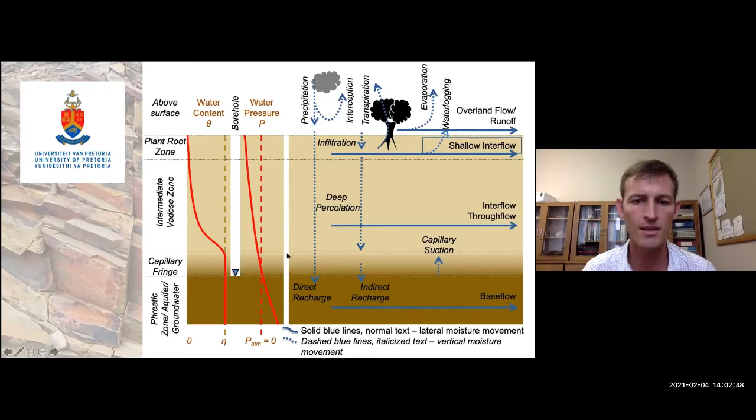Okay, so continuing, this is essentially a simplified model of where we started. As we all understand, between the surface and the groundwater table, we sit with quite a complex distribution of materials. Part of that is a soil zone in which we have influences of evapotranspiration. There's a lot of work being done there by soil scientists, hydrologists, and more recently hydropedologists, one of the great growing new sciences of earth sciences.

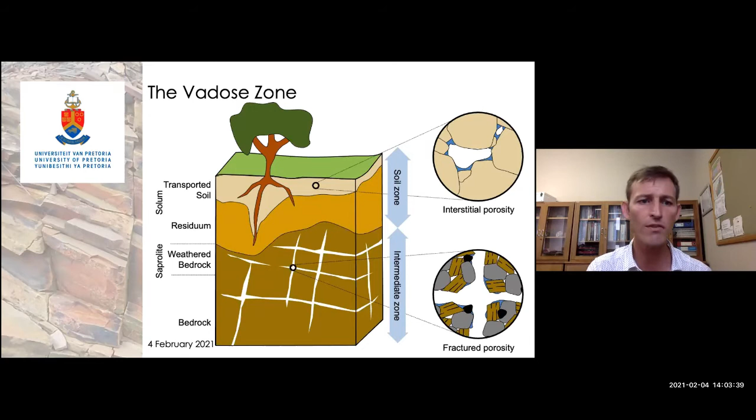And below that, we sit with weathered rock, an area of the saprolite, or of the subsurface rather, that's been neglected quite substantially in terms of unsaturated hydraulics. So we've been looking very specifically at this interface between those. So what happens here is that adhesion becomes more important than cohesion. So wetting of minerals becomes the process driving movement of moisture rather than only gravity, which is cohesive, water molecules clustering together to form heavy drops.

So in a low saturated state, water molecules would be primarily still attracted to mineral surfaces, which means we don't have that cohesion, we have the adhesion onto surfaces. And that retards flow, but it doesn't make it zero. And that's something we often miss: low flow is still flow. But what's remarkably different where we have low saturation is that gravity is not the preferred direction of movement anymore. So water can suddenly go up or sideways. And that is why we have all these funny flow mechanisms in the unsaturated or Vadose zone.

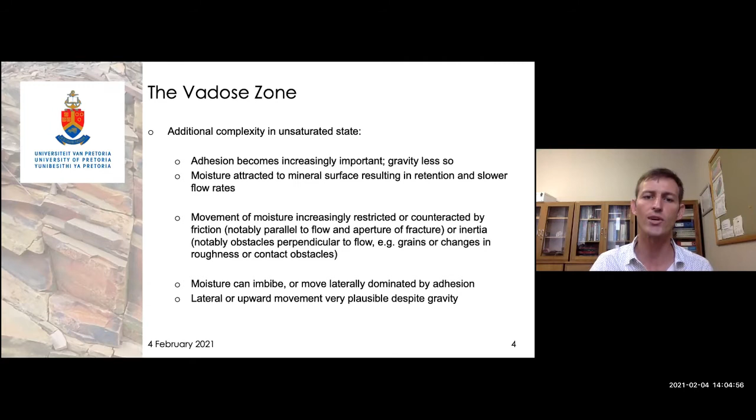We sit with funny things that counteract flow, like friction, which is parallel to flow, and inertia, which is usually perpendicular to it, where we have obstacles or energy losses. And as that happens, we retard the movement of water. So there's just a lot of processes that we have to look at. So just a quick intro there.

Okay, so today we look at unsaturated mechanics and hydraulics. 15 or 10 minutes a person is not nearly enough, but we will look briefly at rock defects, at soil, and at that interface between those two. And the idea here is to be less black boxed, less general fluxes, and to move to actually know a rate of movement of a molecule or a drop of water between the surface and the subsurface.

So regimes, mechanisms, scenarios, we'll touch on that. You all know of Reynolds numbers, which should be below roughly 10. That's only the start of this. For fractures, it can go into thousands. And then on top of that, we need to look at rotationality.

So there's a lot of other things that affect retardation, which make our flow equations less applicable.

So there's obviously many implications of improving our understanding of the unsaturated zone. It's a complex, heterogeneous, and anisotropic zone within our ground profile, and we need to try and quantify the water movement for engineering purposes, for environmental purposes, for recharge purposes.

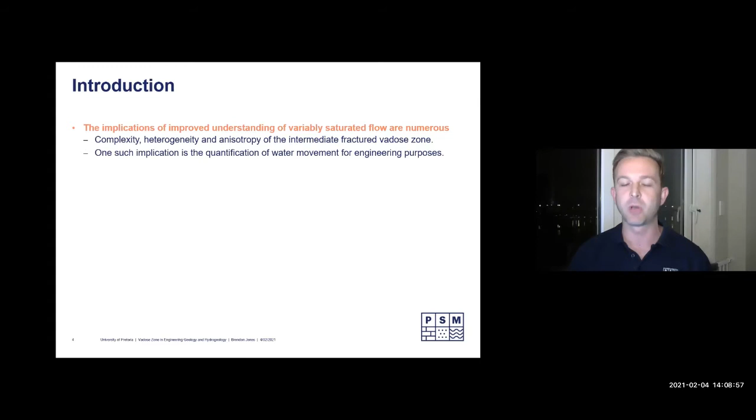So like Matthijs had mentioned, there's a general consensus to view things as a black box and look at it in this bulk manner. So our project really wanted to move away from that and look at discrete and individual processes. And for that, we had to go back to looking at single fractures at first and then build on that complexity, complicating the geometry of the fracture and the number of fractures to make the fracture network. So this is really just the basis of it. There's obviously various applications, like I'd mentioned, mining, civil, hydrogeology.

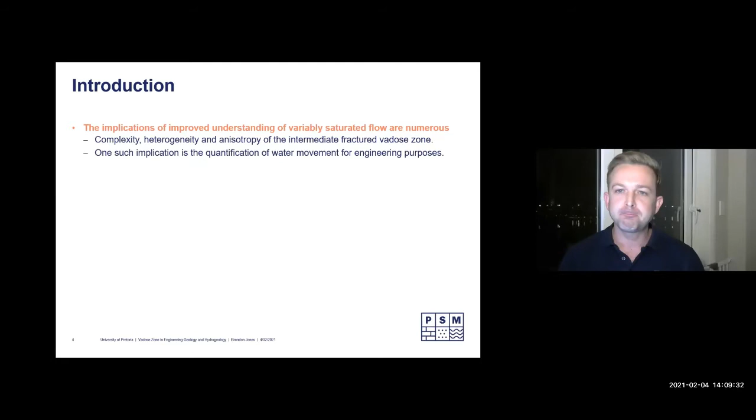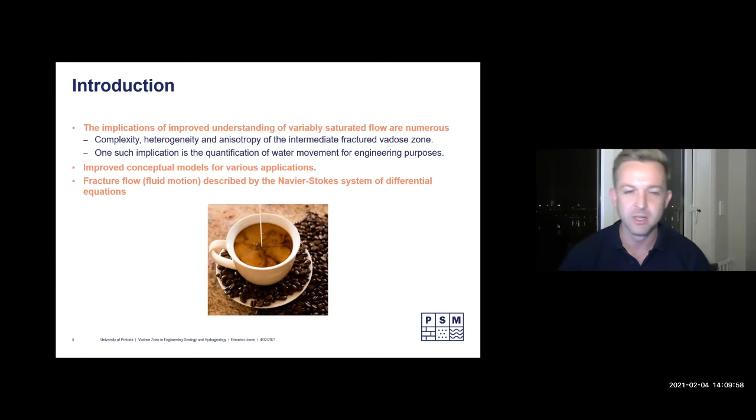And the basis for fluid flow in fractures is governed by the Navier-Stokes equations, the system of differential equations. Now, some of you may know the Navier-Stokes equation. For those of you that don't, it basically describes turbulent flow. It's an equation that describes fluid flow and helps us understand turbulence in fluid flow, and not in fluids only, but obviously even with gases. So there's various applications. They even use it in climate modeling.

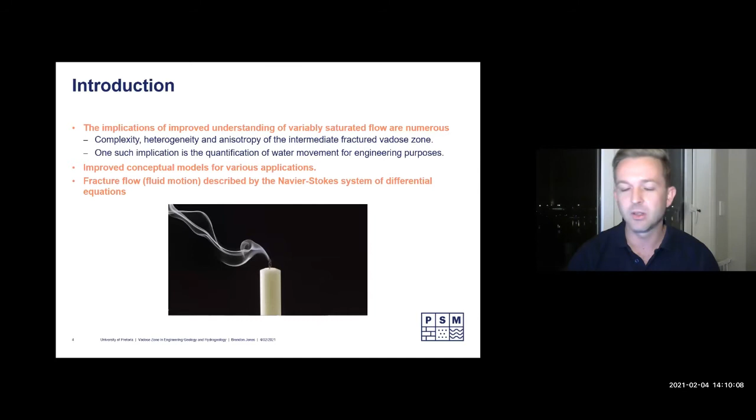So the Navier-Stokes equation is actually one of the Millennium Problems, and the Clay Mathematics Institute is offering a reward of $1 million to solve the Navier-Stokes equations. So if any of you out there have an idea of how to do that, you might have some money up for grabs.

So simplifying the Navier-Stokes equation to describe fluid flow through fractures in natural conditions, we have to oversimplify them. Although natural fractures are generally rough and irregular, for the cubic law we conceptualize a simple model of two smooth parallel plates, and we assume that the matrix is impermeable and that saturated laminar flow conditions apply.

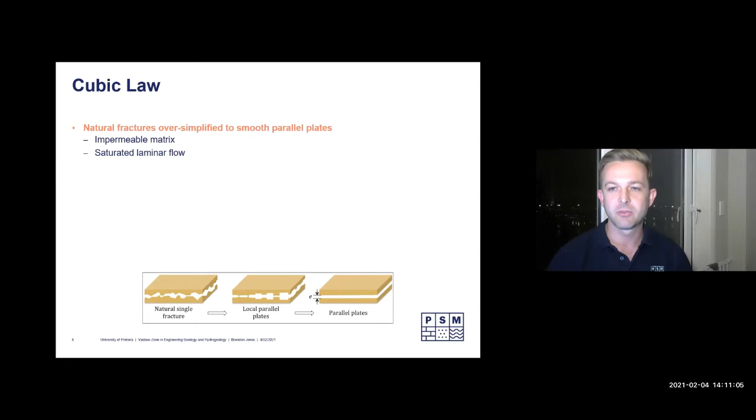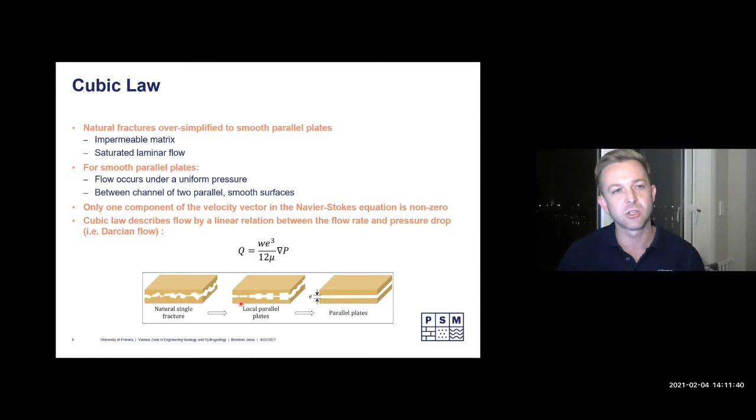And from this very strong simplification of natural conditions, the flux occurring through that single discrete fracture can be determined using the cubic law, which describes the proportionality of the flux to the third power of the aperture. So that right there is our cubic law. And you can see how we get to that from that natural single fracture, which is complicated with geometries. There's stresses involved in that. So the cubic law really simplifies it to these smooth parallel plates.

In terms of flow mechanisms through fractures, we have observed several flow mechanisms. The studies have been done for the last sort of 30 years. There were a lot of studies that were done in Yucca Mountain, which was a proposed nuclear radioactive disposal site in the US.

It was canned, I think, when Barack Obama became president. I think it was that time that they stopped funding and they stopped it, and research into the unsaturated zone kind of dwindled. And then it's really picked up again in the last kind of 5-10 years.

So yes, a lot of the mechanisms that we've observed from these previous studies have shown that we get film flow, rivulet flow, and sliding of droplets in fractures within the unsaturated zone. And these are kind of the most important. There are a couple, but these are probably the three most important types of flow mechanisms.

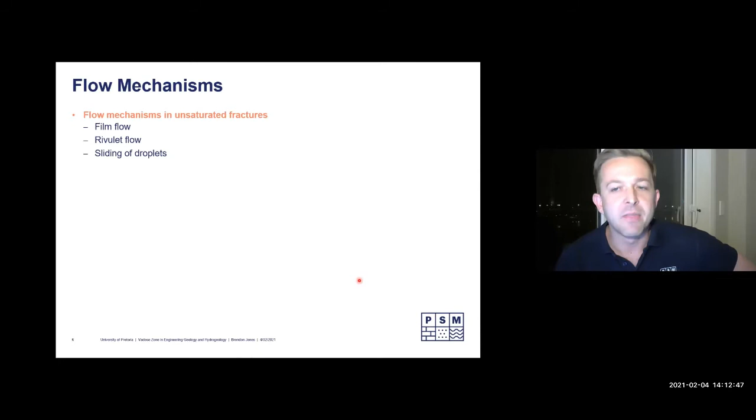And they are very dependent on force interactions between gravity, surface tension, capillary pressure, and viscous forces, and that relationship between adhesion, cohesion, wetting, spreading, and the contact angle. So just like Matthias was talking about between adhesion and cohesion, they play a very important role in how water flows through fractures.

The film flow is really a fast flow under tension. So the small scale roughness of fractures is the most important to that, because there's that adhesion to the surface. Droplets, on the other hand, kind of exist regardless of the wettability. So regardless of whether there's a small scale disparity or not, it's actually held by capillary forces, which is quite weak in large apertures, as we'll see in a couple of later slides in our experiments that we did. But under higher flow rates, rivulets can form.

So this image here kind of just shows that relationship between the contact angle. We've got a 0 contact angle up to a contact angle of 180 degrees. Most rock fractures are closer to 0 degrees. We did flow visualization experiments at first using perspex or plexiglass, and that had a contact angle of about 70. So you expect to see droplets and rivulets, and that's where kind of cohesion is slightly higher than adhesion.

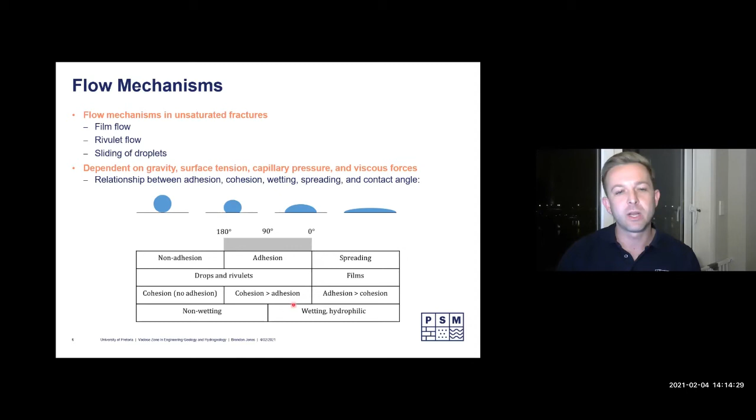But in rock fractures, we're looking at closer to 0 degrees, and that's where you get the spreading, between the spreading and adhesion. So you get films, some droplets and rivulets. Adhesion can be greater than cohesion, but it can also not be. So we get a lot of wetting of the fracture and a bit of a hydrophilic response to flow of fluid through the fracture.

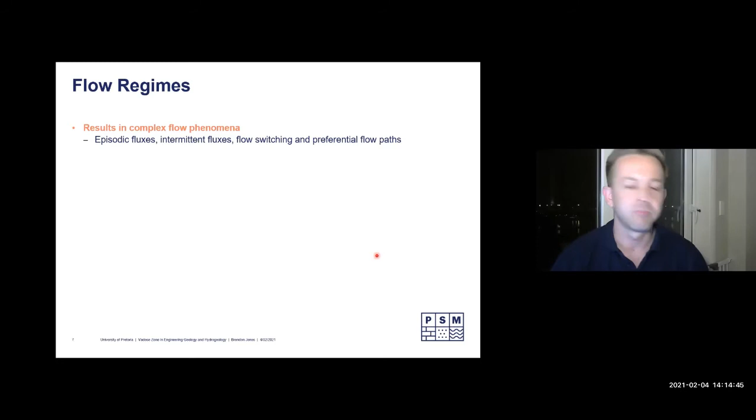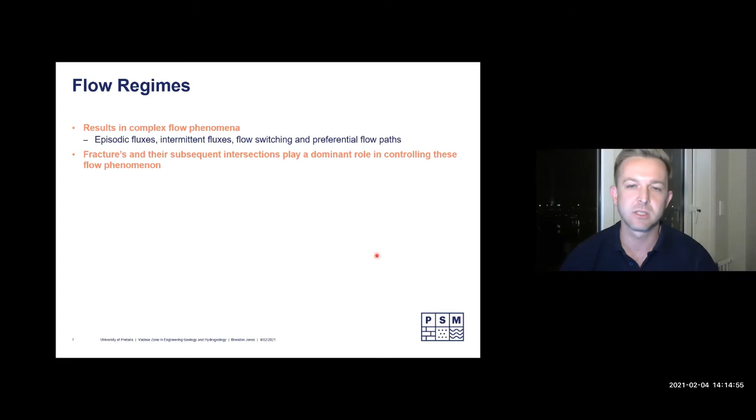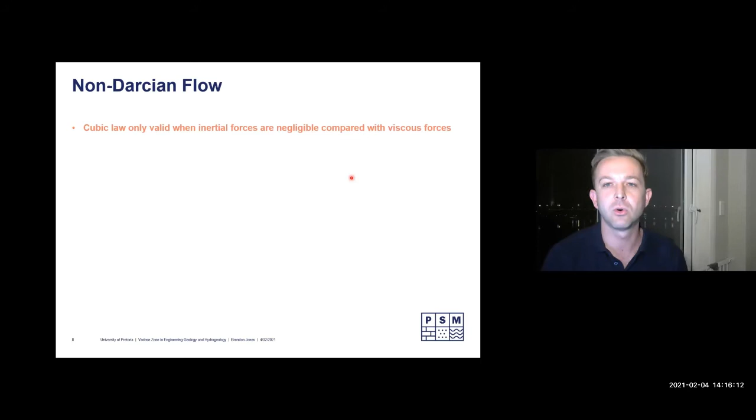But sometimes with the cubic law, which relies on the assumption that there's a linear relationship, it's really only valid when inertial forces are negligible compared with the viscous forces. But that's really only anticipated for low flow rates. So the linear Darcy's law is not always suitable to describe flow behavior in fractured rock.

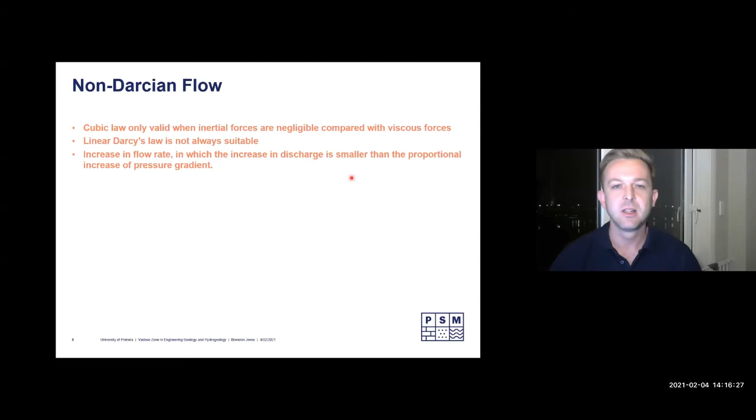And then with an increase in flow rate, the increase in discharge is smaller than the proportional increase of the pressure gradient. That occurs due to non-negligible inertial losses. You can imagine that happens when there's variations in the geometry, when we have roughness, constrictions, bridging in the fractures or obstructions. It induces inertial losses, and that initiates turbulence. So the cubic law relies on a lot of assumptions, which in nature aren't respected, obviously.

So for non-Darcian flow, the most widely used law is called Forchheimer's law, and that essentially describes nonlinear flow by this simple equation, which uses two coefficients, coefficient A and coefficient B, which are the linear and nonlinear coefficients respectively. Coefficient A is a function of the fluid properties, coefficient B is of the medium geometries.

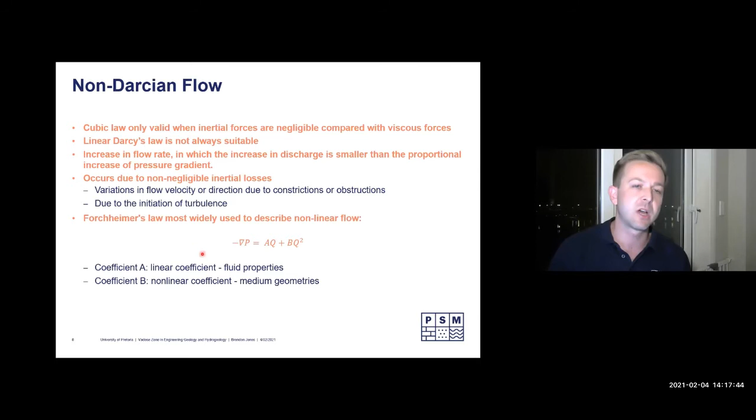So if you'd expect there to be no geometrical or roughness parameters that would induce that turbulence, that coefficient B would become 0. So then you start to get back to the cubic law, and this becomes a linear relationship. So it's really that coefficient B that helps describe nonlinear flow in terms of fracture flow.

So just moving on to a couple of the experimental studies. Now we did quite a few, but I've just highlighted some of the more important ones based on our findings through both applications, where Mampho and Duan will obviously expand on some of the more complicated findings.

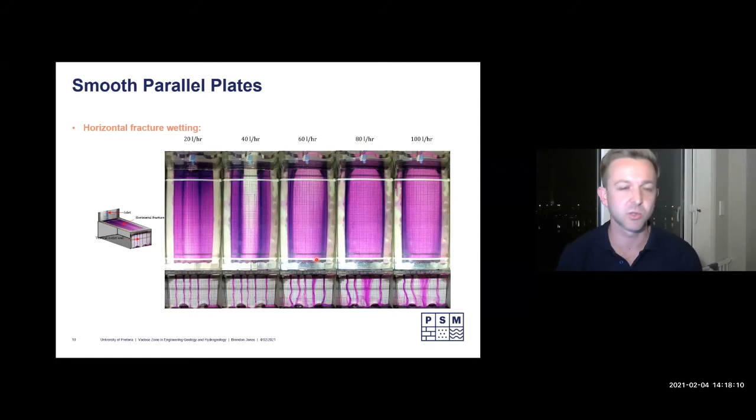So this was one of the very first experiments we did. It was very simple. We had two smooth parallel plates, plexiglass, and what we did there was we had an inlet. There's the horizontal fracture, shown schematically in 3 dimensions. There's the inlet, there's the horizontal fracture, flow then occurred down the slide. There's the fracture intersection, and there's the vertical fracture. So we introduced the water into the inlet here, flowed along the horizontal fracture and out into the vertical fracture.

What's immediately noticeable there is that we have full saturation in the horizontal fracture, but the vertical fracture is variably saturated - probably at most 70% at these high flow rates. So we have these initially dry, free-draining conditions, even for vertical fractures supplied by saturated horizontal fractures. If we extrapolate this to the intermediate fractured vadose zone, the cubic law assumptions are violated, and there's no real proposed alternative, even though we have other equations to describe nonlinear flow. In terms of describing fluxes, it's not that simple.

But what about the influence of other properties and parameters, like the geometry of the fracture, the roughness, infill, flow rates, intersections, fracture networks? So we started off simple with the aim of increasing the complexity in our models.

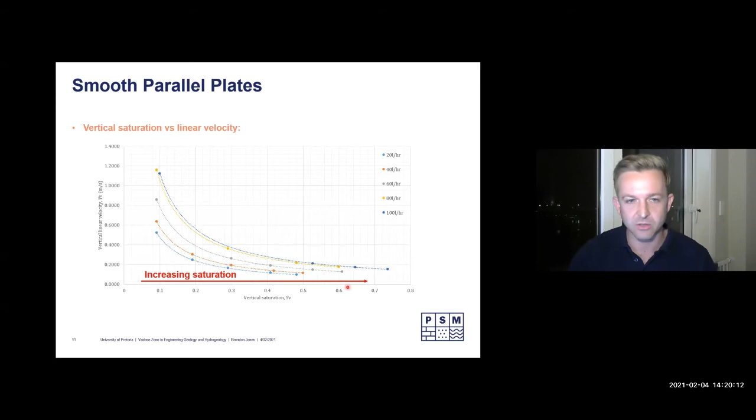If we plot the vertical saturation against the vertical linear velocity, you can see if we increase the saturation - and we're increasing it as we increase the flow rate in this vertical fracture - what happens is when we increase that saturation, we actually get a decreasing velocity in that vertical fracture. That's a function of Bernoulli's law, the continuity principle essentially, where you increase the vertical velocity as you decrease the degree of saturation. That has to happen to accommodate that amount of fluid flow flowing through the fracture.

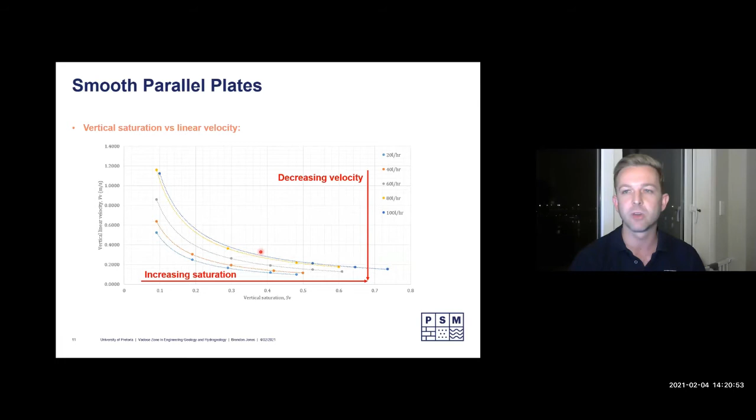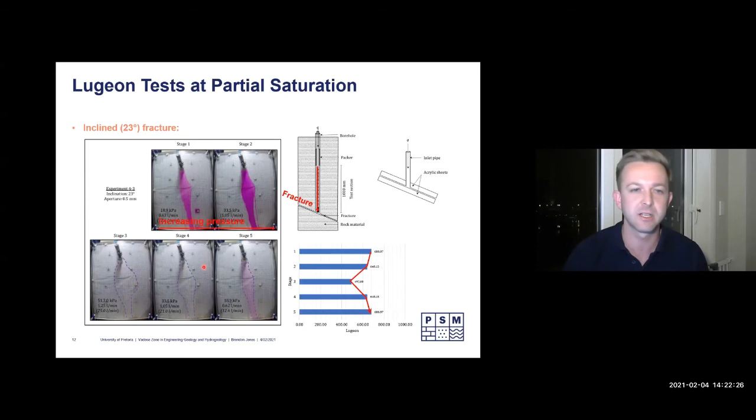So that just shows you the increasing pressure between these screenshots, and then we have decreasing pressure. You'd theoretically expect laminar flow where all of these Lugeon values should be the same, but we're getting this turbulence. Usually in fracture Lugeon tests, when you see that turbulent or nonlinear flow, you start to think about the roughness of the fracture, and that guides how you'd characterize your rock mass. If you're looking to grout it, you'd think about your grout mix, because very turbulent flows probably mean your fracture sets are fairly rough with a very variable aperture.

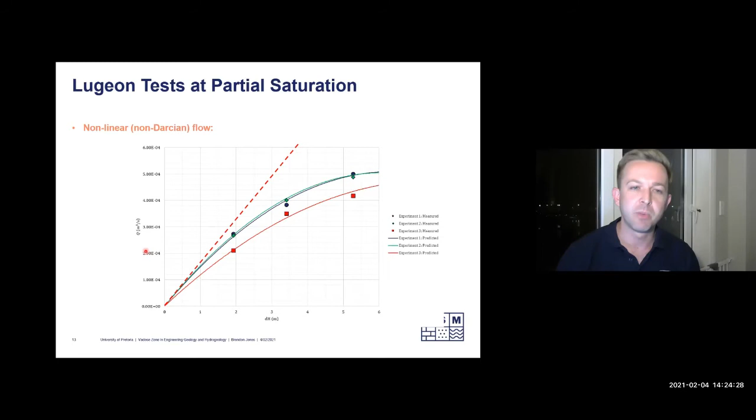In terms of Reynolds number, it really describes the onset of turbulence. In fractures, full turbulence is generally assumed as occurring beyond a Reynolds number of about 2000. But in some instances, we're already seeing turbulence onset as low as a Reynolds number of 5. Full turbulence kind of occurs at a much higher Reynolds number when flow rates are higher.

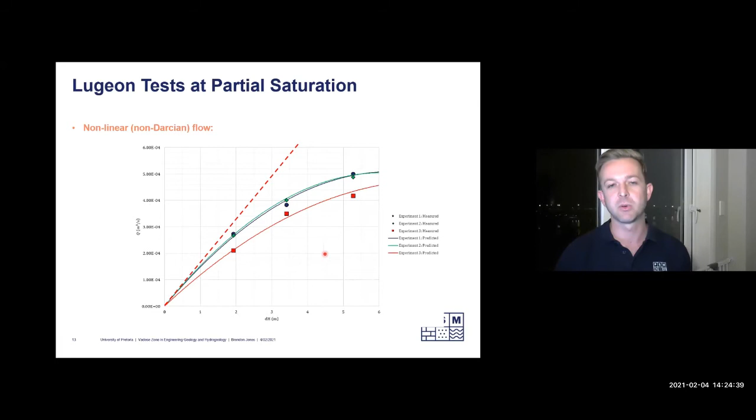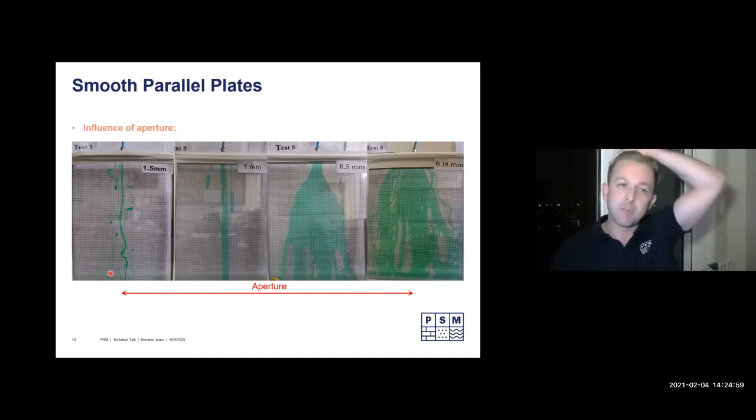These are a few photos from our research colleague Katlego Sekgole, who did a master's looking at variation of fracture aperture. I wanted to put these in here to show you the influence of mechanisms in fractures, and how we get this gravity-driven flow, and here we get capillary-driven flow. Gravity forces dominate towards the left, and capillary forces dominate towards the right.

To finish off, before Mampho really complicates things, I wanted to think about some of the contributions and the implications in field applications.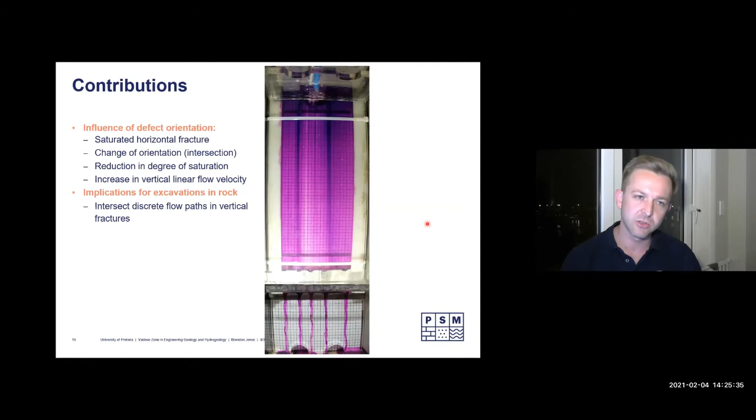If we look at some of the influence of defect orientation, when we have this saturated horizontal fracture and then we get a change of orientation, which might be regarded as a fracture intersection, when we have a change to a lower degree of saturation in the vertical flow path, what happens if we go and excavate our tunnel through that portion of that vertical fracture? We won't intersect any water. The rock mass or the tunnel face will be dry. We can go and intersect it there, and then we intersect this discrete flow path.

Because there's such a low degree of saturation on this vertical face, we're going to get high inflow rates, because all of that groundwater flow in the horizontal fracture is having to be transported at a low degree of saturation, which means a higher linear velocity in this little flow path.

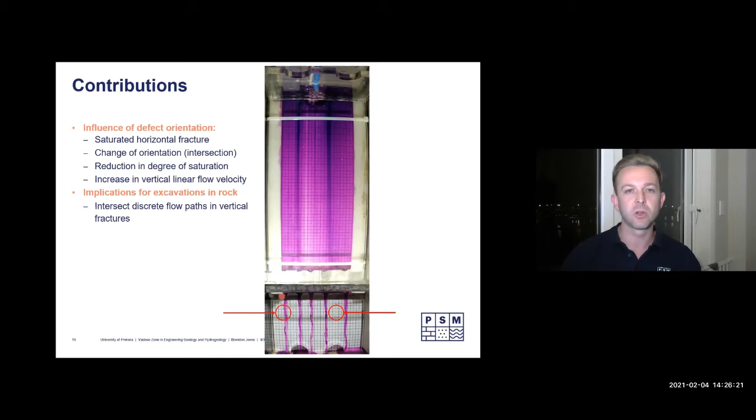We can see these types of things in nature. Think about a waterfall where you've got this pooling at the top in that horizontal crest above the waterfall, and then what happens when it spills over the crest? You get these nice singular waterfall features. That's a great example, or an analogy, of how fractures will behave in wider aperture fractures.

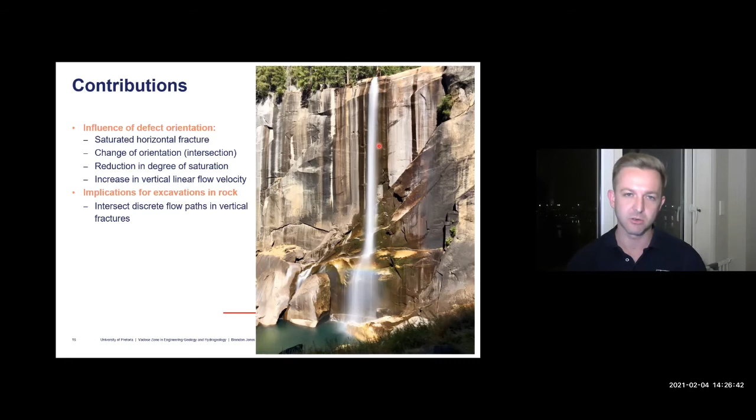So what implications do we have for site characterization? If we're looking at a hypothetical discontinuity under saturated conditions, when we do our Lugeon tests, we expect to see some laminar flow, and we should be getting similar Lugeon values. What would we do in that case? You average the Lugeon values and you get a Lugeon value of X.

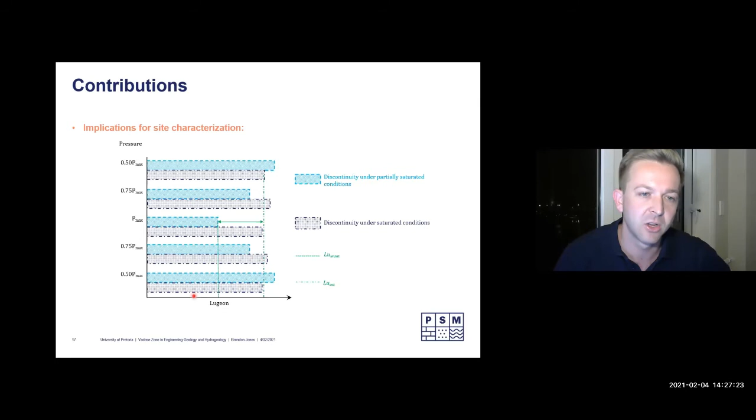But if we're doing it under partially saturated conditions, like in that experiment, we start to see what we describe as turbulent flow, so at our highest pressure here, we've got the lowest Lugeon number. In that case, we have to take a lower Lugeon value. It's the same fracture, the same rock mass, but we're going to assign two different Lugeon values, and how will that impact how we characterize the rock mass?

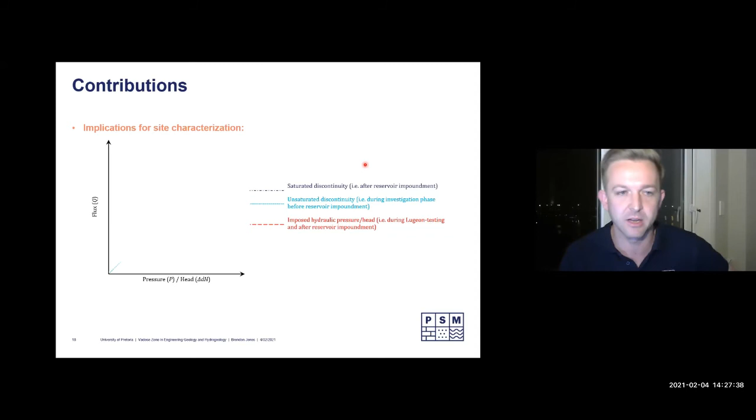If we look at the same situation but on a PQ diagram, a pressure-flux diagram, say for a dam site before reservoir impoundment, we get the fractures and this non-linear flow. Then we build the dam wall and impound the reservoir, and that fracture becomes saturated, so we'll have linear flow occurring hypothetically through that fracture. So again, look at that difference. How are you characterizing your permeabilities from your Lugeon tests? Are you considering the degree of saturation at that time, and how that's going to change over the project life cycle?

Just a few nice photos to really finish it off. This was one of our case studies, De Hoop Dam. This is about a kilometer-long dam wall built near Steelpoort. It's 80 meters high at its tallest, and we got hold of a lot of data along this during the excavation of the foundations.

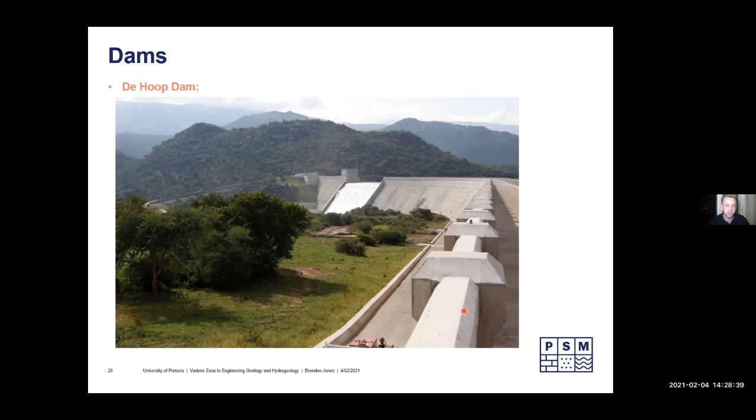So this whole foundation was mapped. They conducted water pressure tests, Lugeon tests, before grouting in the grout holes. So we had all of that, and we were able to really scrutinize that data.

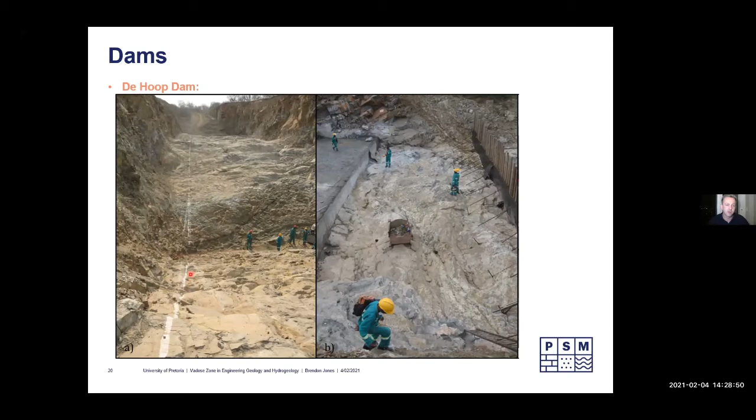One of the interesting things we noticed was that as we moved down to the river section, where there was a higher degree of saturation because we were closer to the river, we started to see a lot more correlation between parameters - Lugeon takes, grout takes, RQDs, fracture characteristics. There was great correlation between them, but as soon as we moved up into the upper flanks where it was variably saturated or even unsaturated, we saw a chaotic correlation or no correlation at all.

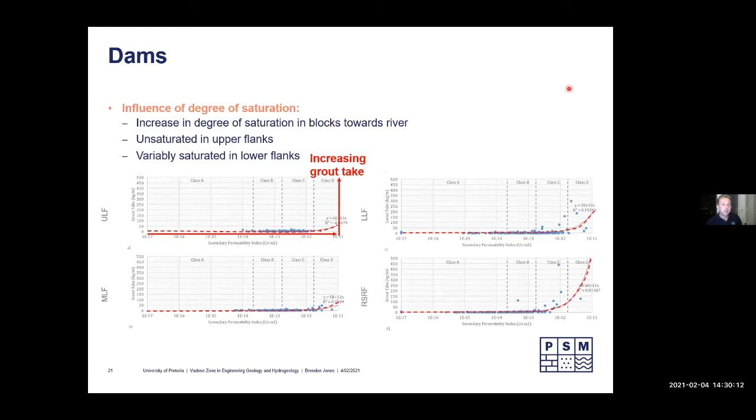A couple more in terms of tunneling here in Sydney. We get these Hawkesbury sandstones that are horizontally bedded, and we see these wonderful horizontal bedding planes full of water, and you get these nice flows out of vertical fractures or vertical faces. That has some implications in the tunneling industry, obviously.

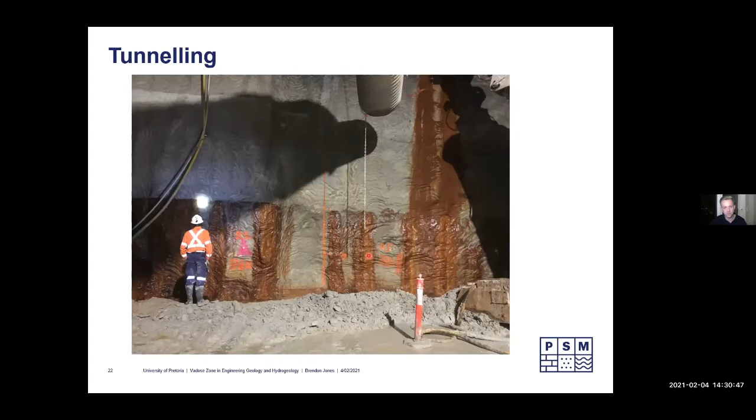Here's a great example from one of the tunnels they're busy constructing at the moment. Look at that beautiful horizontal bedding plane. Everything's dry above it. As soon as that water-filled horizontal fracture spills over into the tunnel, we've got this vertical flow.

So where I really want to go with this is start to look at trying to quantify or looking at the contributions of what we've researched here, and how we apply it to what we do in our day-to-day. We started to look at that by understanding how recharge zones can be several hundred meters away, but saturated horizontal fractures transport this, and then they are intersected either by vertical fractures or tunnel faces where there's a low degree of saturation but a high flow velocity.

It's probably not so great to see in the resolution showing on your side there, but there's quite a large amount of flow coming out of the tunnel face here.

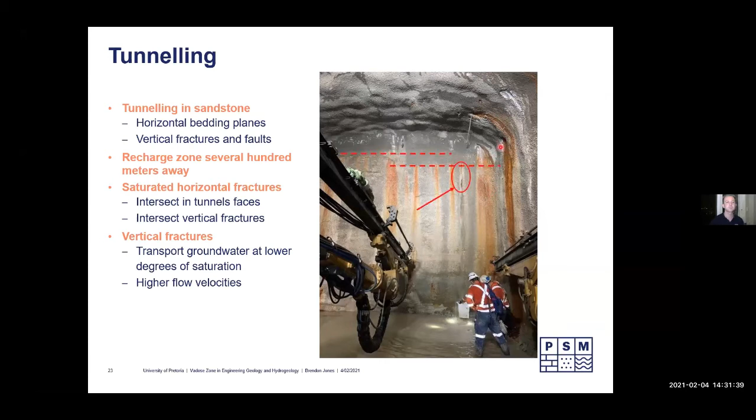It involved quite a big study looking at how much connectivity there was in the rock mass units and how we characterized the different rock mass units. We needed to consider it was more of a thermo-hydromechanical coupling scenario where you had variable saturation, mechanical properties of the rock mass, and this thermal influence. You didn't want to inject water to cool the rock mass, and then load it by injecting the water. So you pressurize the slope, and then it's further pressured by the steam, by the geothermal activity.

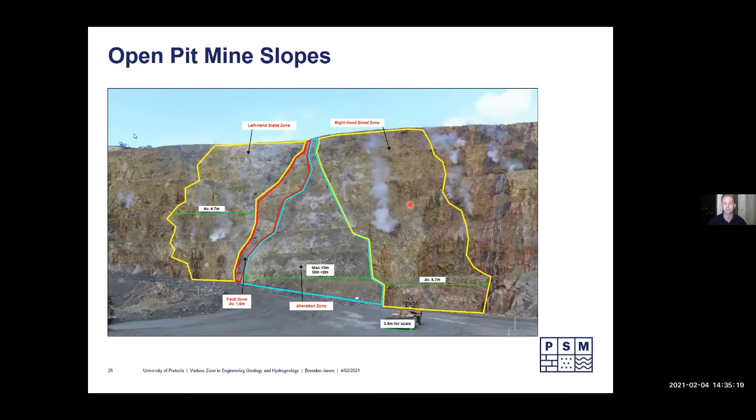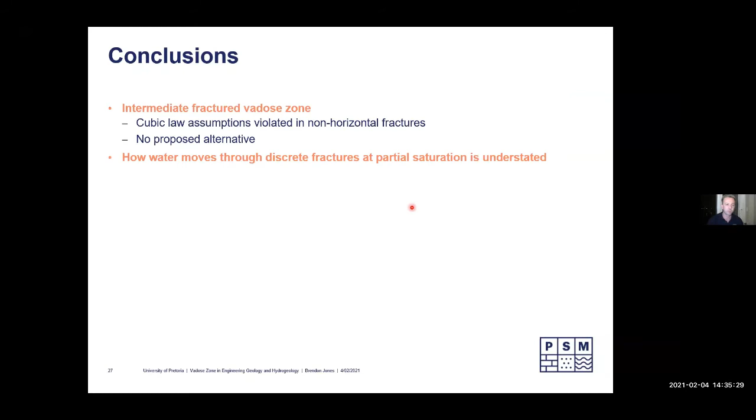So in conclusion, in the intermediate fractured Vadose zone, the cubic law assumptions are violated in non-horizontal fractures. There's really been no proposed alternatives, and how water moves through discrete fractures at partial saturation is understated. There's less emphasis on fluxes, but there needs to be more emphasis on variable travel paths driven by linear velocity. More studies are required to obtain a unified view of preferential flow through fractures, and that allows us to link processes.

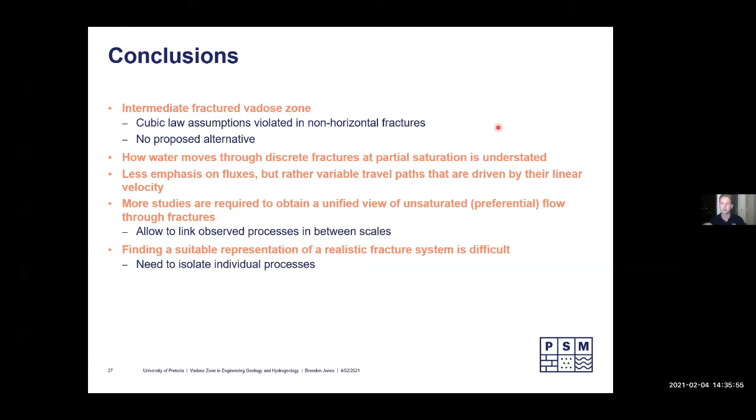Finding a suitable representation of a rock mass is very difficult. We've got to look at the smooth parallel plates, then look at roughness, then look at infill, and slowly build up our understanding by separating all these components. But there are preliminary answers to explain flow deviations for commonly applied saturated Darcian-based approaches, and previous saturated conditions that were assumed or used in calculations are incorrect. Hopefully this research has emphasized how fractures, variably saturated conditions, and orientation influence flow mechanisms. We really require a deep understanding of small-scale processes that characterize the intermediate fractured Vadose zone.

So with that, I'd like to thank you and hand you over to Mampho, to increase the complexity even more. Thank you.

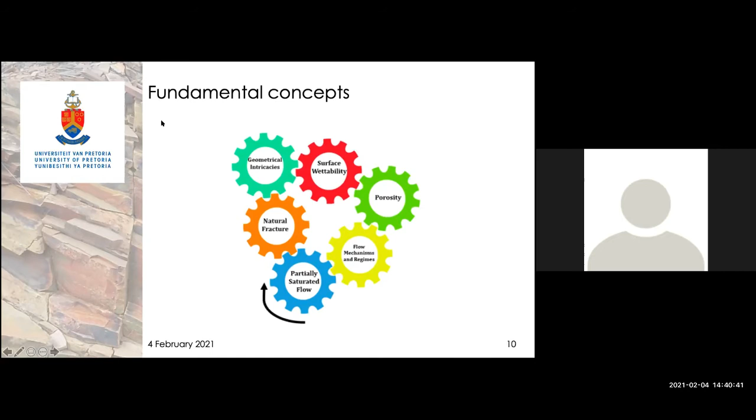So the conceptual model was based on continuous influx conditions with 4 tests conducted per inclination, namely horizontal, 30 degrees, 60 degrees, and vertical.

So in each test, there were 3 distinct phases: initially dry, when the rock was initially dry, then wet, and the re-wetting phase. Water was topped up after drainage in the initially dry phase to commence the wet phase, followed by the re-wetting phase. Then flow meters were used to measure the different flow rates.

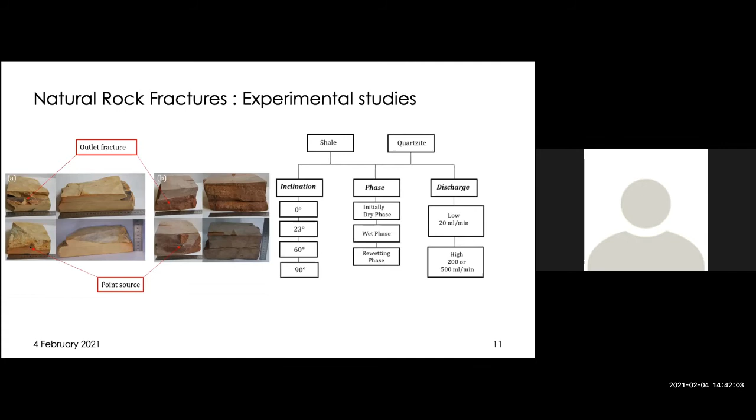So you had your low flow meter rates, which was at 20 millilitres per minute, and also your high flow meter flow rates, which was at 200 or 500 millilitres per minute.

So following the principles of flow, how rock fractures wet to eventually store or transmit water at variable moisture contexts is subject to very small scale influences at mineral surface water molecule level. The visual observations show that water preferentially flows on the fracture surfaces in the lateral and longitudinal directions. Then the flow mechanisms, which was covered by Dr. Jones, indicate fluid instabilities and rapid infiltration of water under unsaturated conditions.

And the advancement of the flow paths, as you can see, from 0 seconds to 16 seconds for the shale, to 61 seconds to 532 seconds, will mainly depend on the fluid mass, its velocity, and angle of inclination. So the changing of orientations determines the relationship between adhesion, whether the side walls will be wetted, and cohesion, whether you have attraction of water molecules to each other, resulting in gravitation.

So a fluid in both samples, in the direction of the gravitational potential, as water flows along the fracture, gravity will destabilize it and the fluid will gravitate vertically downwards. This demonstrates that there is less capillarity and more gravitational drainage in both samples for all angles of inclination. So keeping in mind that falling head tests were conducted, hydraulic gradients still dictate flow under high enough water or moisture contents. But at low values, orientations of fracture walls may dictate the direction of water movement rather than gravity alone.

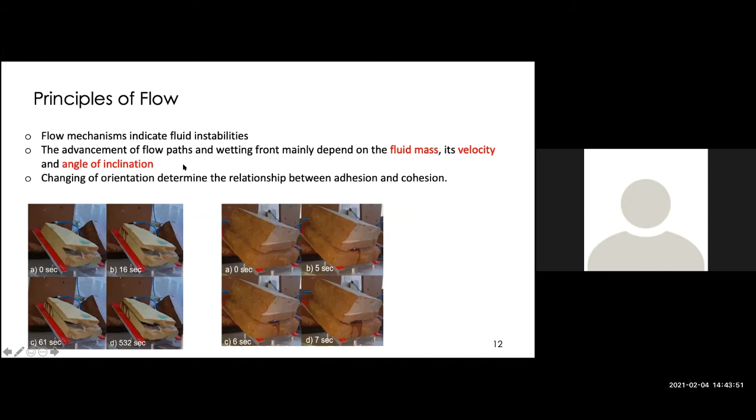So following the initially dry phase, fluid flow in the wetting and re-wetting phase forms new flow paths, or follows the pre-existing wetted flow paths from the initially dry phase. As a result, the flow paths either merged, widened, or there was an increase in the dispersion of the wetting front. So this brings us to the fact that variation in surface morphologies may create regions with lower wetting resistance, where the fluid deviates from the flow path.

Then contact obstacles delayed the flow path length, hence water drained faster, traveling in straight lines in larger surface areas with minimal contact points.

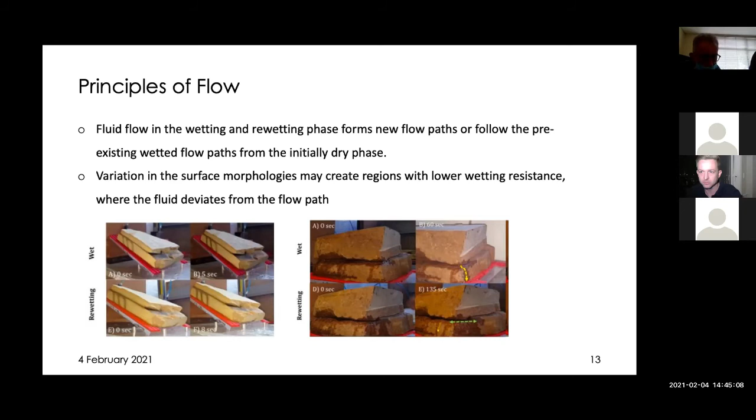So the geometry of rock fractures will affect fluid flow due to a change in aperture, roughness, and contact obstacles. So, for example, in South Africa, most of the developed nodes are underlain by fairly shallow fractured bedrock with regional groundwater levels generally below the bedrock surface. So this will require an enhanced diligence in understanding what will happen when draining wet rock or when wetting dry rock. Because as developments go deeper, should the design not adequately address the altering subsurface cycles, the consequences will become more threatening.

So fractured rocks also behave as a double porosity medium. So porosity of a medium is quantified by the volume V, as you can see, volume under investigation. So with an increasing V, porosity fluctuates and generally stabilizes in a range where the porosity remains constant over a certain representative elementary volume. So as represented in the figure, the REV becomes important when modeling for natural fractured systems. So in this case, we were modeling for single discrete fracture.

So the different scale of investigation will result in the rock mass being considered as a porous medium. So for example, if two similar natural fractures without any random pore heterogeneousness are under investigation, the porosity will be the same. But if the volume of scale of one sample is extended, the porosity may change based on the microscopic and the macroscopic heterogeneities.

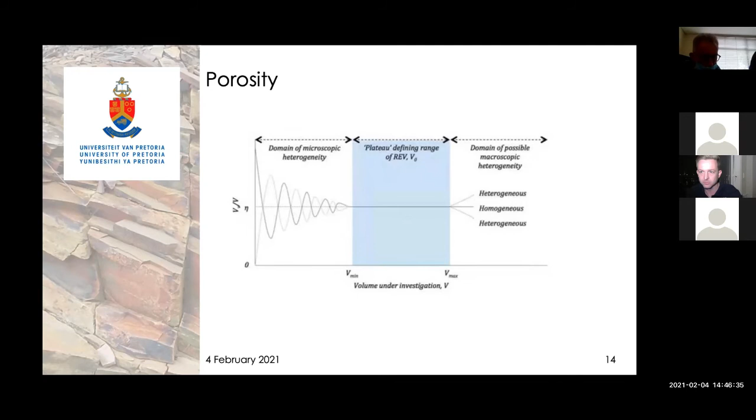So from our experiment, we know that despite the minerals present in the rocks having different wetting properties, imbibition into the primary pore spaces plays a dominant role, implying a double porosity system where the shale was more porous than the quartzite. And when flow occurs through fractures, at some moisture threshold, infiltration into the interstitial porosity occurs, which will result in low discharge rates affecting the flow regime.

So when investigating flow visualizations within fractured systems, we should also consider exactly what happens in the fracture, what is the flow mechanism, and what is the flow regime, and not only concentrate on water budgets. This is difficult to determine as a rock is not translucent, but we know that flow mechanisms and regimes are mainly affected by the geometry of the rock.

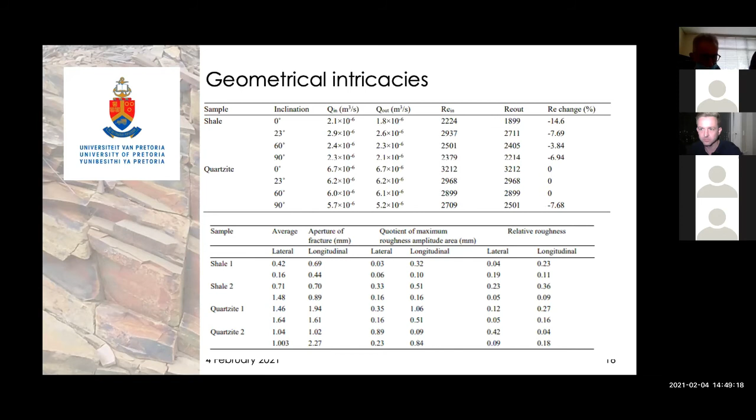So at first you could map where you have increased weathering and erosion of structures exposed on surface, or you can have a decrease of decomposition due to more stable environmental conditions, or the rock block not in the true orientation, resulting in changes of strike and dip, which will ultimately affect your results. So orientation data of fractures are biased based on the collection technique. So borehole core or outcrop scan line mapping apply a linear sampling technique, implying that statistical methods are often used to reduce the bias.

However, this will require fractures to be exposed and present along the trace length, in which for truncation bias, some of these fractures are not accessible. So these results may be affected greatly because stress changes in the rock mass will either increase or decrease the aperture width and cause a change in permeability. Then this will affect your discharge rates, influence the distribution of the hydraulic head, and affect the seepage forces acting on the rock mass. So this highlights sensitivity of field measurements and understanding that roughness influences not only the flow rate, but the distribution of moisture in defects.

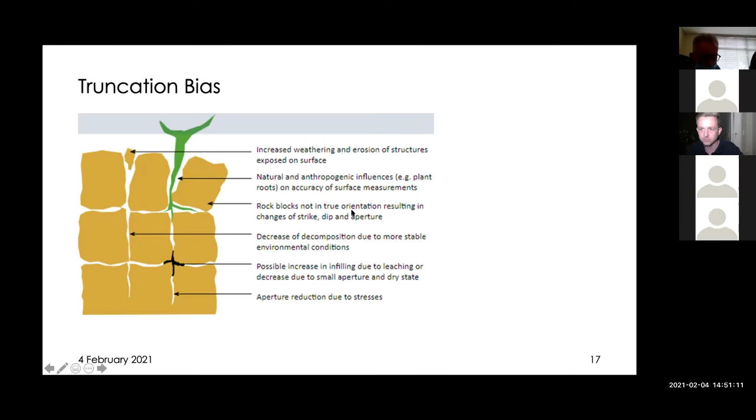So as part of our experiments, from our lab experiments, we already know that the estimation of the two-dimensional JRC, which is your joint roughness coefficient, needs further refinement to more accurately estimate the effects of geometric controls. Therefore, the determination of roughness in joint line survey data should reflect the section along the joint that will have the biggest influence on flow. This is because joint roughness is one of the characteristics that needs careful quantification as it governs the shear strength of discontinuities within a rock mass and its stability.

So then small-scale roughness of joint walls was reviewed in great detail through a three-dimensional sampling approach that involves the use of circular discs of different dimensions, which is then your 50 millimeters, 100, 200, and 400 millimeters. The discs were employed together with the geological compass to take joint orientation readings along the joint planes of the slope. So then the readings recorded at similar points displayed variation owing to the asperities of the joint surface and the size of the disc used. So this approach results in a representative orientation of the discontinuity planes due to an enormous amount of data that is collected on the same plane.

So from this research, we learned that the amplitude and the wavelength measurements obtained are not incorrect, but rather the empirical equation that we're currently using for JRC needs some altering on the scale measurements in order to accommodate for the lengths measured between your different contact points, which have effects on your flow visualizations, and not only the scale length in which it is derived. So a lot of work is still needed to be done, and also incorporating model techniques, as this determination will enable us to understand the mechanical and hydraulic behavior of rock mass better.

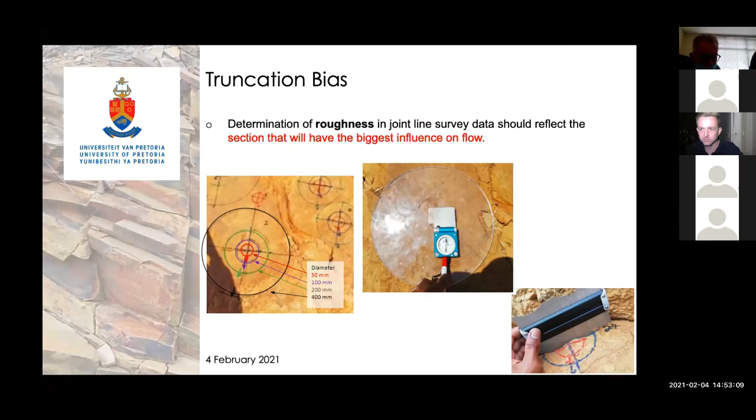So in conclusion, insight into unsaturated flow through discrete natural rock fractures aids to improve our understanding of groundwater recharge and contamination, reduction in shear strength of wet fractures in rock mass, and possible solutions to the drainage of rock slopes and excavations. So in order to truly understand the influence of fracture geometry on flow, more complex experimental work entailing different aperture, roughness, and infill will be beneficial.

So as our way forward, we need to upscale to the field level, which is what we are currently doing, and then also incorporate more complex systems. That includes then your case studies in order to relate it to real life problems.

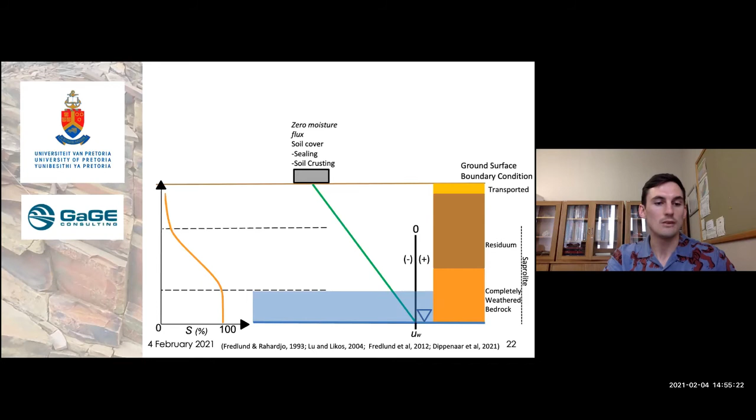I'll be talking today about just basic unsaturated soil mechanics, and this forms part of my PhD studies at the University of Pretoria. This is a basic representation of a deeply weathered soil profile with the water table shown by the blue line at the bottom of the slide. The pore water pressure distribution is shown by the green line and is linear, representing hydrostatic conditions with zero moisture flux at the ground surface. The soil moisture distribution under the same conditions will be nonlinear and represents two distinct points, namely the air entry value and the residual suction.

These 2 points subdivide the Vadose zone into 3 subsections, starting with the capillary fringe or zone, where the soil is virtually saturated, the 2-phase zone, where air and water is continuous in the pores, and the dry zone, where water exists as films around soil grains and only air is continuous in the pores.

In reality, the hydrostatic conditions exist when the ground surface is sealed by either pavements, foundations, or thick soil crusting. When the climate is arid and soil is bare, there will be a net moisture loss and a general upward movement of water, and greater negative pore water pressures will exist. This condition can also occur if numerous eucalyptus trees or gum trees are present.

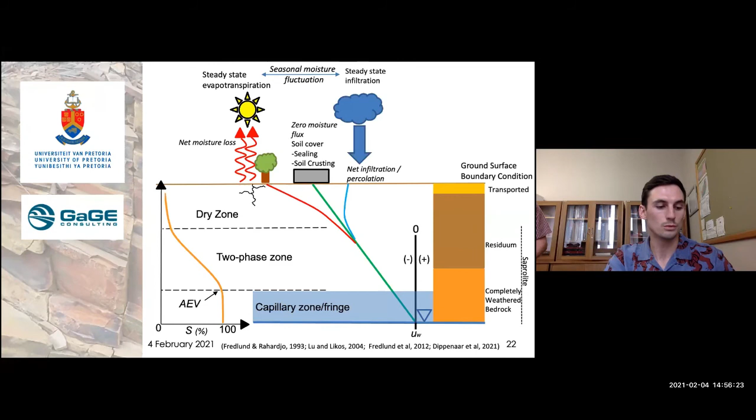Going the other way, infiltration by precipitating water causes a net moisture increase and a downward movement of soil moisture, and lesser negative pore pressures will exist. In a special case, flooding of desiccated soil or an open excavation may cause the pore water pressure to tend to zero and saturated conditions. The changes in the pore water pressures occur in the upper portion of the profile known as the active zone.

So how do we describe Vadose zone or unsaturated soil mechanics stress states? To put into context, saturated soil is explained by using effective stress, which is the total stress minus the pore water pressure. For unsaturated soils, 2 independent stress variables are needed. These are matric suction, which is equal to pore air pressure minus pore water pressure, and net normal stress, which is sigma minus pore air pressure.

2 stress state descriptors are needed for unsaturated soil because a change in pore water pressure does not produce the same change in the soil as a change in normal stress. We characterize the soil with the soil water characteristic curve. The water content is on the y-axis and the log of suction is on the x-axis. We developed this graph by measuring the suction values by using a high capacity tensiometer while a saturated soil dries out.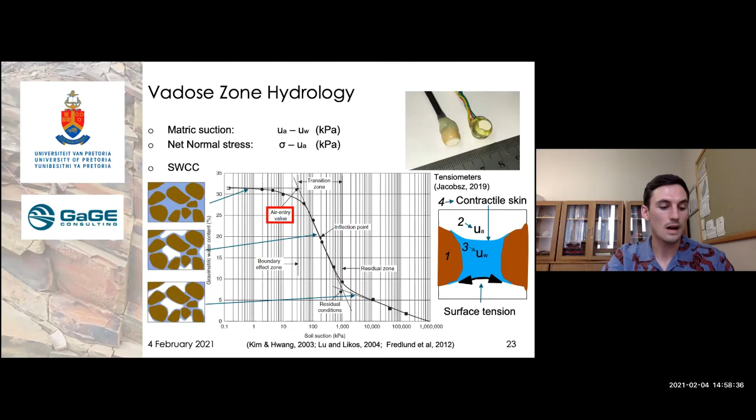The pressure difference across this contractile skin is the matric suction. When this pressure difference increases, or in other words, matric suction increases, the contractile skin needs to stay in equilibrium by tightening along the surface tension. This is how unsaturated sandy soils gain apparent cohesion. The soil water characteristic curve is used to estimate or predict unsaturated soil property functions and behavior of unsaturated soils.

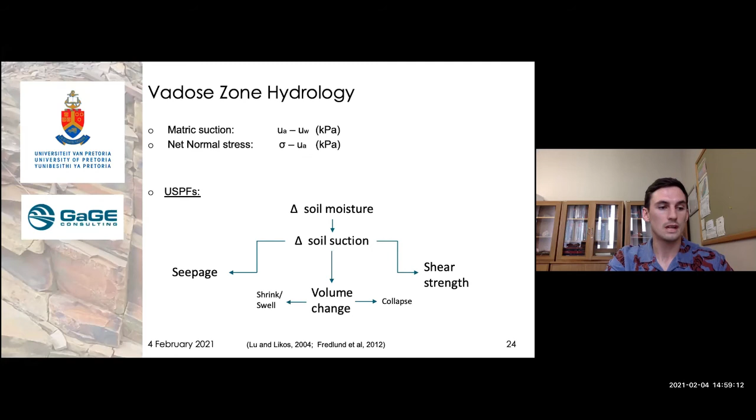The unsaturated soil's property functions are seepage, volume, and shear strength. These are all influenced by changes of moisture in the soil. And I'm sure most of you have dealt with volume change problems, be it swelling or collapsing soils, or shear strength problems. So today I'll just be discussing seepage, also known as the permeability function of unsaturated soils. The permeability function is predicted using the saturated coefficient of permeability and the soil water characteristic curves.

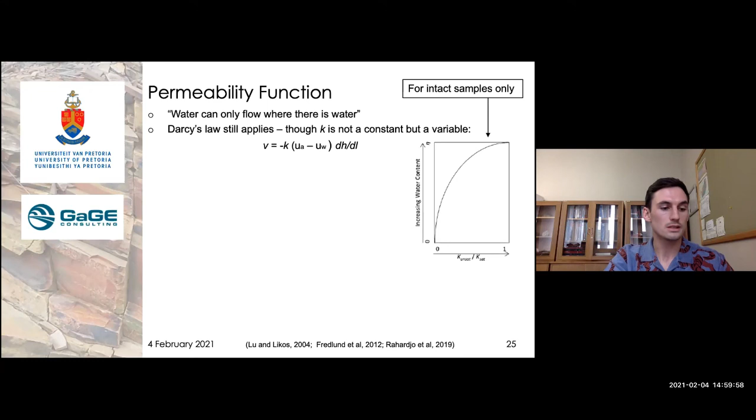Matric suction, or rather the unsaturated soil property functions, are dependent on matric suction, and matric suction exhibits hysteresis during wetting and drying cycles. Therefore, the unsaturated soil property functions also exhibit hysteresis.

The soil water characteristic curve represents a family of curves. When measuring suctions of a drying sample, the drying curve is produced. If suctions are measured of a wetting sample from a dry state, the wetting curve is produced. These two curves represent, but not always, the boundary of all possible curves.

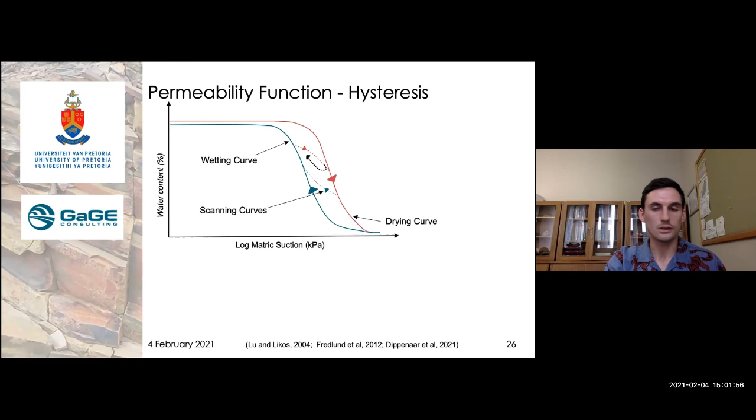These are called scanning curves, and there's an infinite amount of curves possible in between these two main curves. Where the soil suctions lie on or within these two boundary curves will impact the soil water property functions, and it could impact the permeability by orders of magnitude.

Hysteresis happens because during the wetting and drying of soil, the pores empty out in a different order than what they fill up, and an advancing meniscus has a different shape to a receding one. Air can also be trapped during a wetting process, and the geometry of connecting pores also plays a role in this.

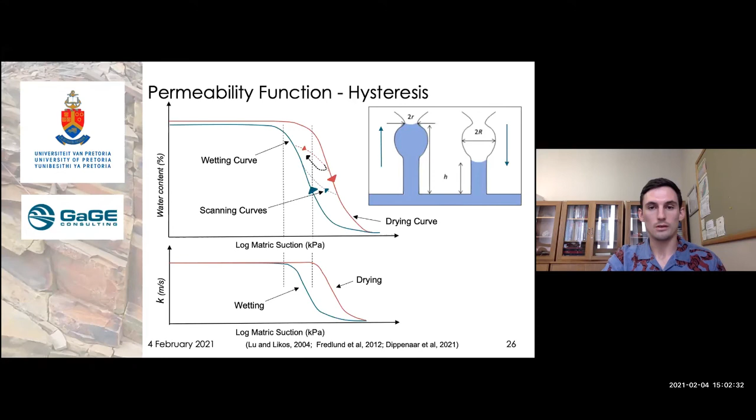As mentioned on the first slide, the condition at the boundary surface has a major impact on the pore water pressure distribution of the profile. By altering the boundary conditions, the ground surface moisture flux will change. Regionally, this may happen through climate change.

Even though this is a natural process, research has shown that humans are aiding in this, so much so that we've reached the Anthropocene. Scientists say South Africa will experience a 3 to 6 degrees Celsius increase in average air temperatures in the next 100 years. Rainfall is more difficult to predict, but scientists say wet areas will get wetter and dry areas drier. Evaporation is expected to increase, with similar amounts of rainfall expected in some areas, but distributed during only more intense rainfall events.

You can imagine how this overall effect will affect the soil moisture. Locally, humans have a direct impact on the ground surface, be it through developments, farming, mining, building dams, etc.

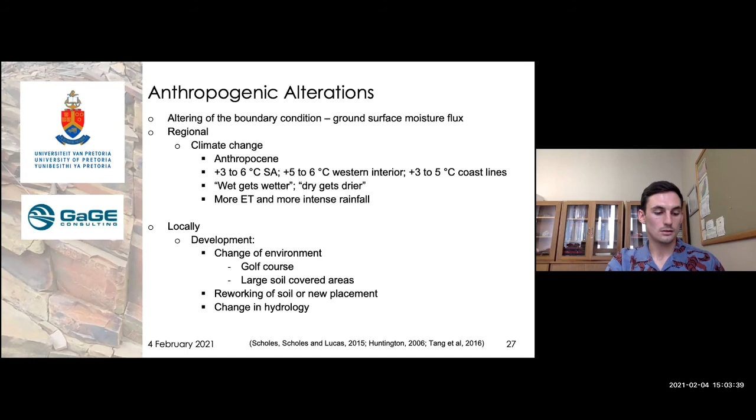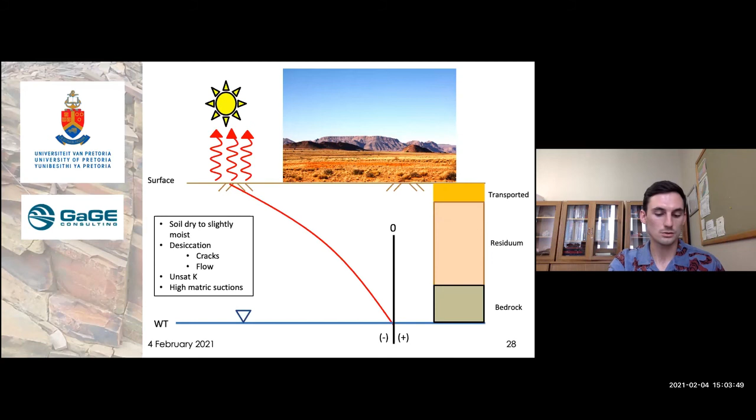To show how humans can impact the pore water pressure profile, I'll quickly run through an example. Here we are in the Northern Cape: arid climate, dry soils, high matric suctions. A developer comes along and wants to build a golf course with an eco estate. This will change the moisture distribution, consequently the suctions, thereby changing the unsaturated soil property functions. These changes will impact the movement of pollutants in the soil, the groundwater vulnerability, and slope stability of parts of this development built on slopes.

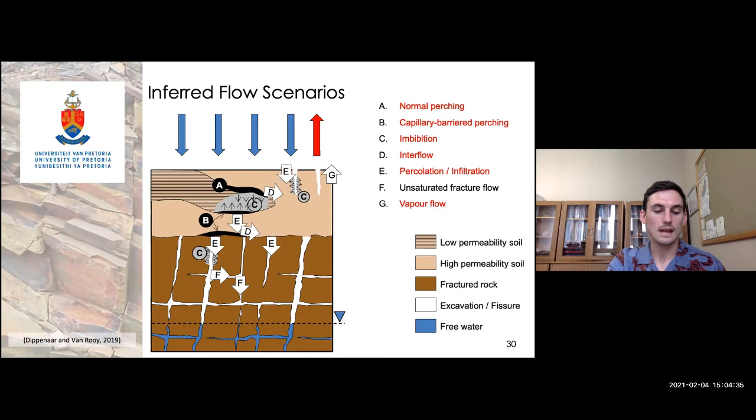How water flows through the Vadose zone is an important part of this research. Here are some inferred flow scenarios. In the Vadose zone, water movement is not only governed by gravity, but water can be held under suctions above a capillary barrier or be mobile under hydraulic gradients. The impact that anthropogenic activities will have on these flows is what we'll look at going forward.

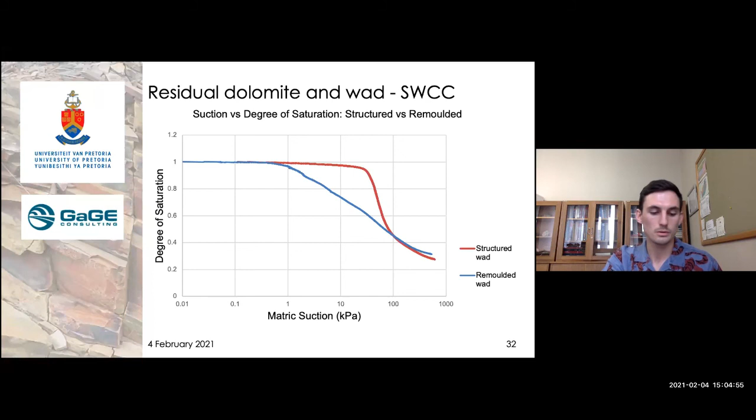What we looked at so far is the study of residual dolomite and wad. Here's the soil water characteristic curve of a structured wad sample and a remolded sample of the same material. This is what it looked like in the field, and here are some of its properties. It's mainly a silty material with a high liquid limit and a low plasticity index. It was mainly composed of manganese oxide, followed by iron oxides and some silica.

The high liquid limit was due to the fine grading of the soil, the microscopic structure of the manganese oxides, namely birnessite, and the ability for water to attach to the oxide surfaces through adhesion. In structured form, the material had a dry density of 309 kilograms per cubic meter, and at the saturated state it was able to have a water content of 300%.

Looking at the soil water characteristic curves, the structured wad has a much higher air entry value than the remolded sample. This is due to the distribution of smaller interconnected pore spaces provided by the inherent structure in the wad material. This structure contributes to the high water holding capacity of wad as well.

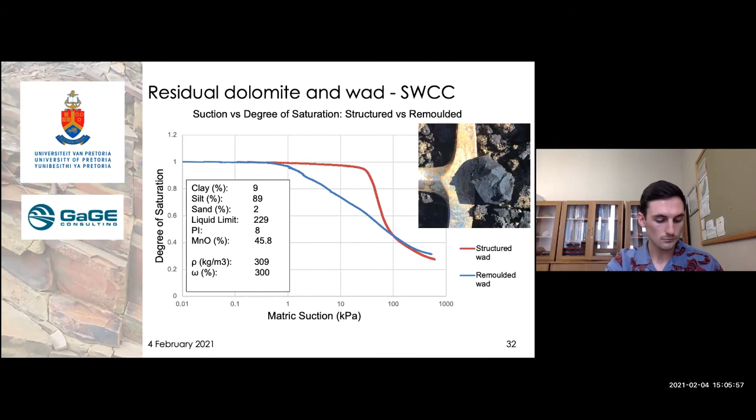Going forward, we'll be completing studies looking at unsaturated soil properties of low plasticity silty residual soils in different climates in South Africa. With these samples, we'll be developing soil water characteristic curves, determining their unsaturated soil property functions, and looking at the chemical makeups of these soils. We would also like to join up and work with the work done in hydropedology to try to help quantify the qualitative work done there.

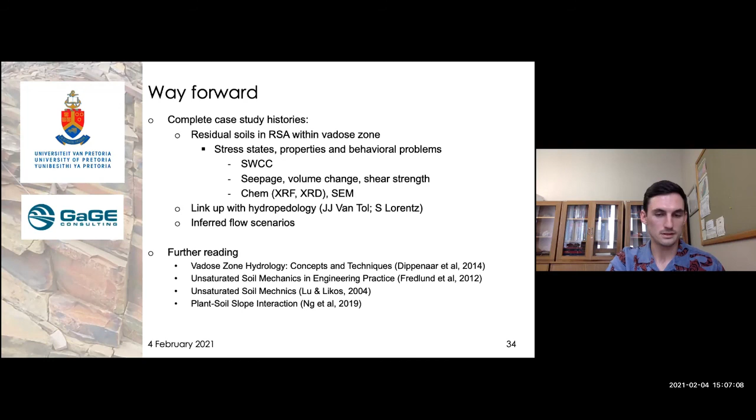And lastly, we will be developing and quantifying more of the inferred flow scenarios. If you're interested in any further reading in the subject, here are some good references - these are my references. And this is just an example as to where someone didn't take unsaturated soil mechanics seriously.